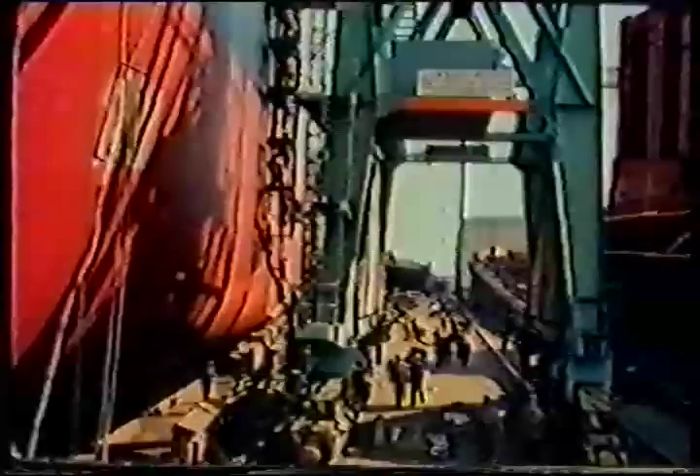Thyssen-Nordseewerke in Emden is one of the major shipyards in the Federal Republic of Germany. The company has 3 building berths for new vessels, 1 dry dock, and 2 floating docks. The Thyssen yard employs close to 4,000 people and averages an annual turnover of more than 400 million Deutschmarks. It is located right in the middle of the large North Sea shipping centers.

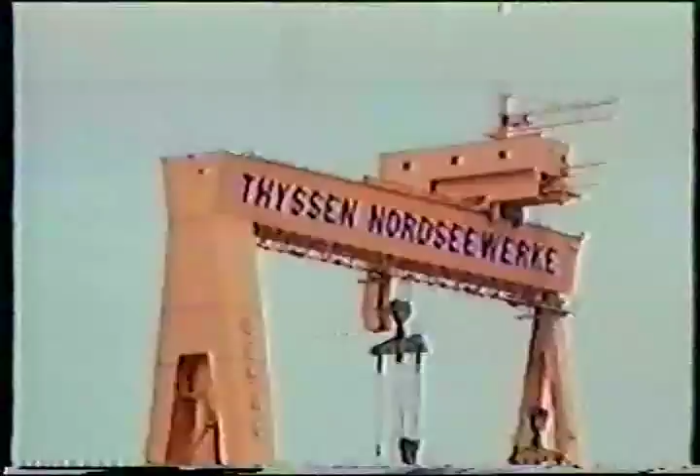Building ships for special purposes, both military and civilian, has had a long tradition at Thyssen-Nordseewerke. One example of this is the BACO liner, an entirely new type of ship. It works according to the dock principle. It is lowered like a floating dock to enable the docking and undocking of the barges.

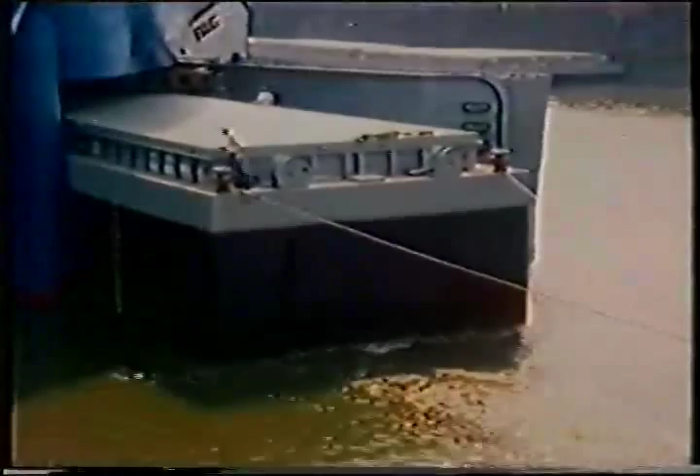In the ports of loading and discharge, the barges, 12 with a carrying capacity of 800 tons each, can be transshipped within 2 hours. Protracted waiting periods are avoided by employing 3 sets of barges, 1 set each in the ports of loading and discharge, while the 3rd set travels continually on the BACO liner. The containers, a maximum of 500, are handled by the ship's own gantry crane.

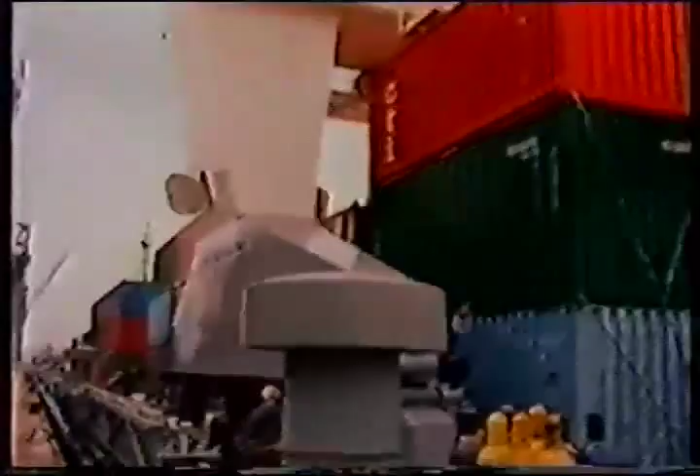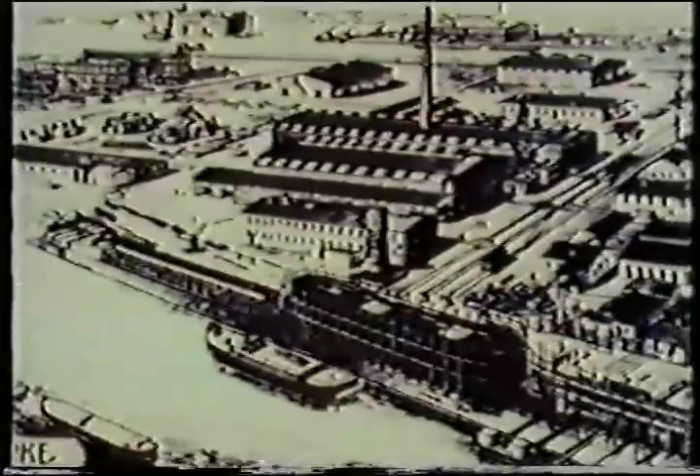In the summer of 1979, the first BACO liner left the port of Bremen on its maiden voyage to the Nigerian capital of Lagos. In 1978, the Thyssen yard celebrated its 75th anniversary. In 1903, the company was entered into the commercial register with a share capital of 2.1 million Goldmarks. In 1911, Kaiser Wilhelm II coined the phrase, "Germany's future lies on the seas." The country's general economic upsurge led also to a rapid expansion of the Nordseewerke shipyard.

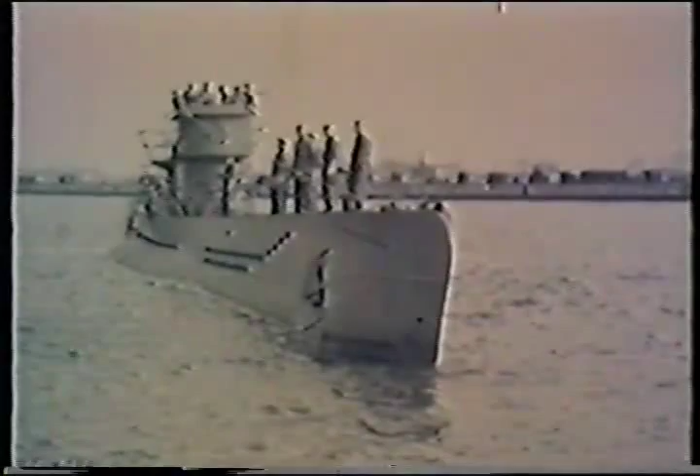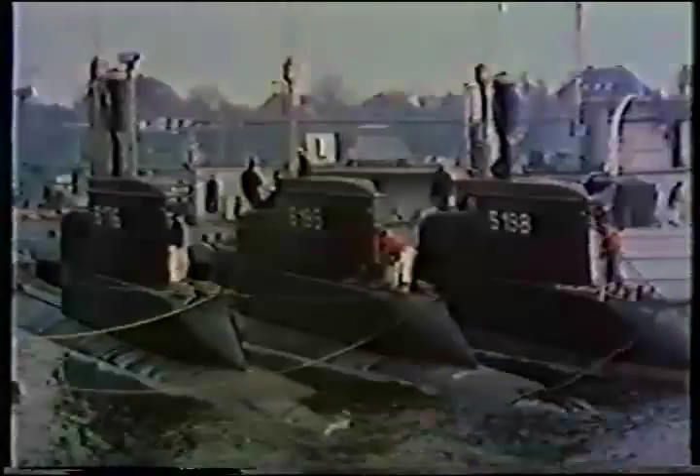The company's tradition of special shipbuilding began during the First World War and was continued during the years of World War II. Until 1945, 30 submarines were launched at Emden. The 60s and 70s brought new significant orders for special naval vessels. First, 15 submarines were built for the Royal Norwegian Navy, then another 10 for the West German Navy. These 25 submarines are a significant contribution to the naval defense potential of the 2 countries. During naval maneuvers of the NATO Defense Alliance, these submarines have proved to be most reliable and effective.

The company's expertise in specialized shipbuilding became the decisive factor for concluding a contract with the Argentinian government. Since 1978, the yard has been engaged in the design and construction of the TR-1700 prototype for the Republic of Argentina. The TR-1700 submarine is characterized by great diving depth, an extensive operating range at economic speeds, its worldwide employment potential, and excellent maneuverability.

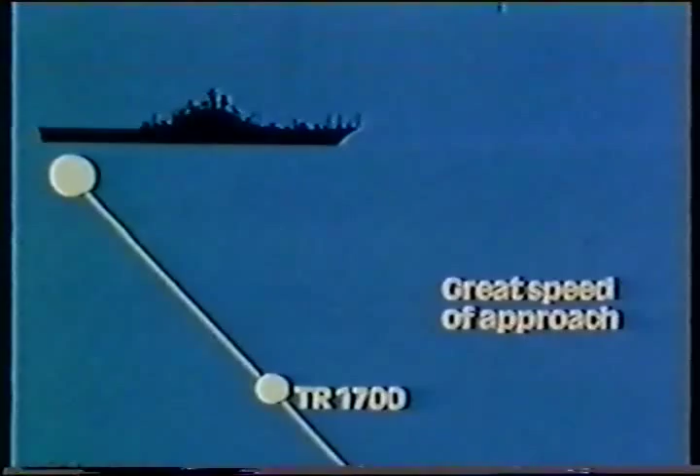Because of its high top speed, the TR-1700 submarine is capable of pursuing even fast-moving targets. This enables the ship to catch up with an enemy even from disadvantageous starting positions. The TR-1700 carries highly sophisticated equipment. Its components are supplied by the leading manufacturers of the Western world and meet the most exacting requirements of modern naval warfare.

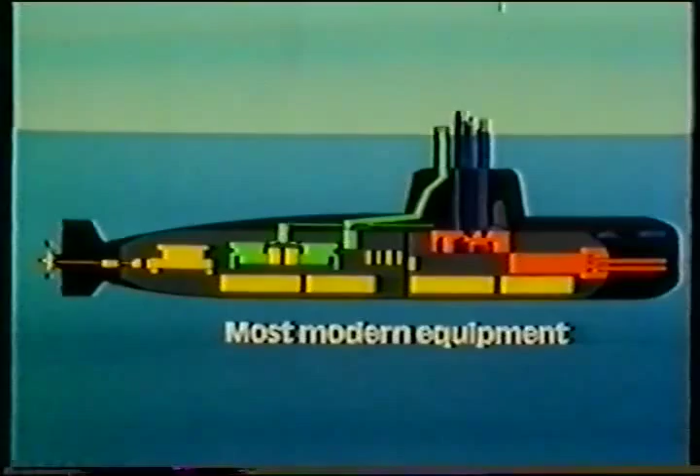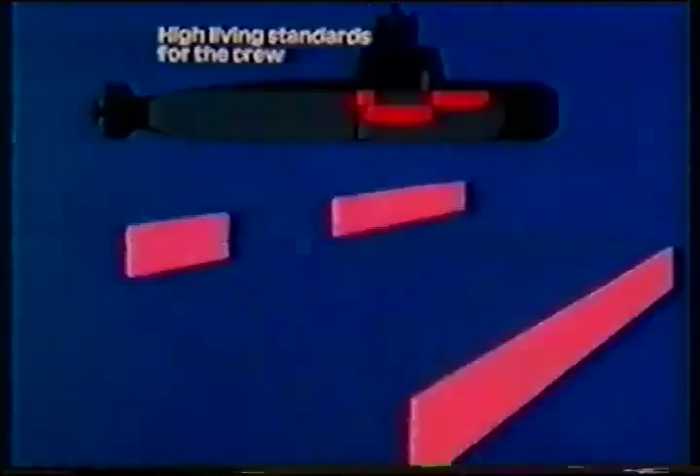To ease the extraordinary strain of long missions, a high degree of living comfort is provided for the crew. The officers' cabins, the cabins for the chief petty officers, the crew's accommodations, the messes, the galley, and the sanitary facilities offer extraordinary comfort in a confined space.

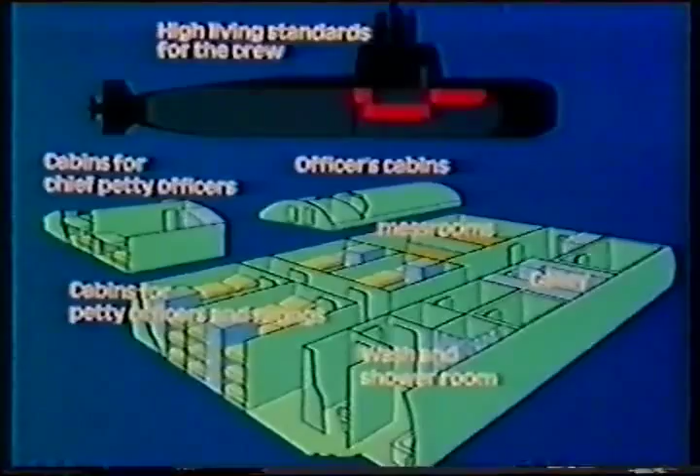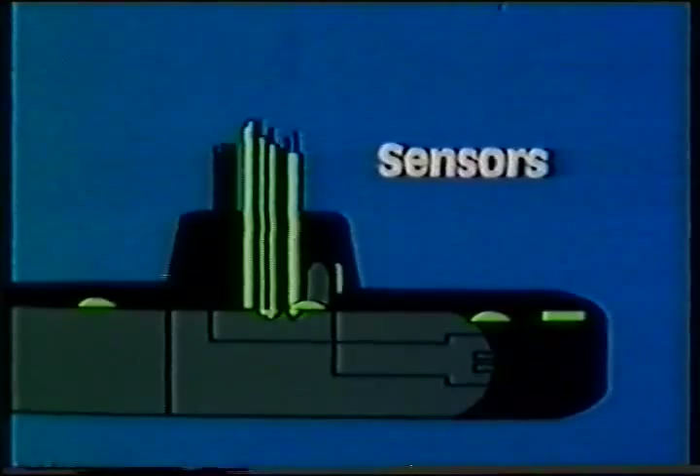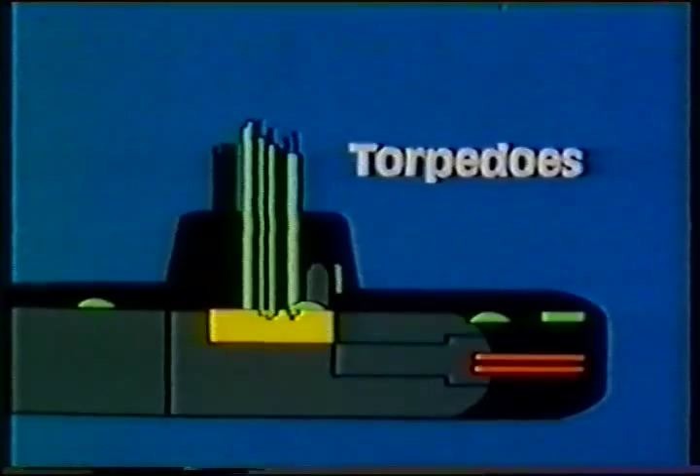The submarine forms the basis for a sophisticated weapons system: super-sensitive sensors, the fire control system, and the wire-guided torpedoes. The surface sensors consist of periscopes, radar system, and ESM system.

The data from these devices, used only while the submarine is surfaced or submerged at periscope depth, are gathered in the Combat Information Center. With these surface sensors, it is possible to detect, locate, and recognize surface ships, aircraft, and helicopters. Still more important are the underwater sensors, the sonar systems. The main sonar system operates both in the active and passive modes. In the passive mode, it can receive noises emitted by surface ships or submarines and thus locate these vessels even at great distances. Sound waves emitted in the active mode can, by means of reflection, detect objects that do not produce any noise of their own.

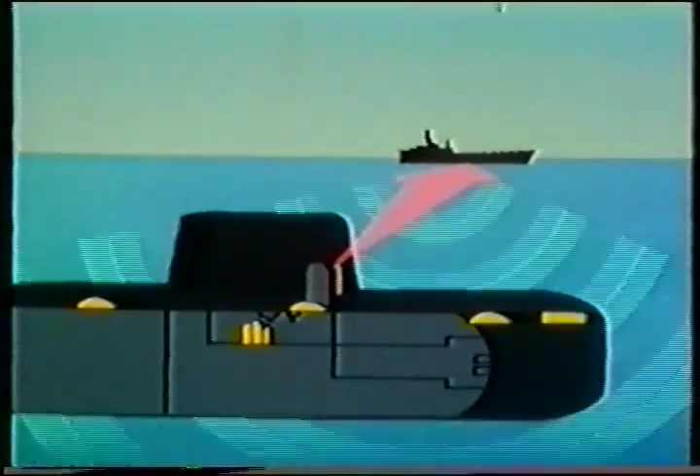All target data are fed into the fire control computer, which evaluates the target bearings by means of a sophisticated digital computing system and freely programmable processors, and transmits the target data to the weapons. The fire control system is capable of tracking and engaging several targets simultaneously with a very high hit probability.

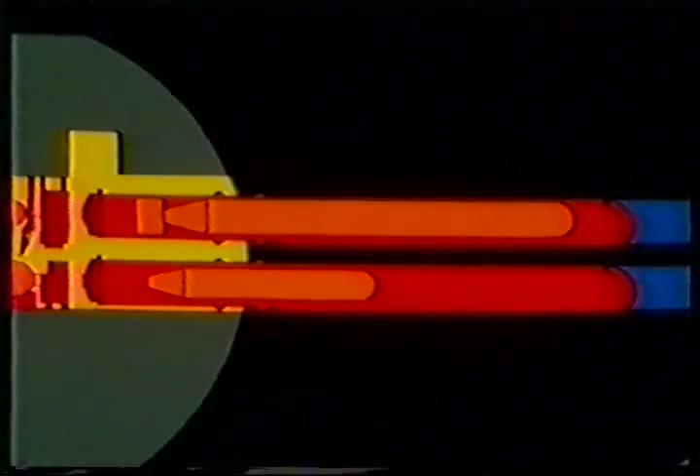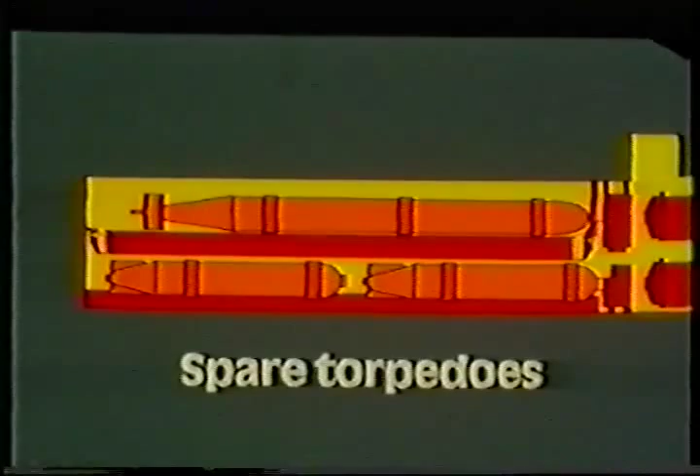The torpedoes are housed ready to be fired in 6 torpedo tubes. The torpedo tubes are designed according to the swim-out principle, which means that the torpedoes leave the tubes self-propelled. The fighting power of the submarine is considerably increased by the reserve torpedoes housed in the torpedo store. A hydraulic mechanical system enables a rapid reloading of the tubes.

The TR-1700 has a rescue system which allows to save the lives of a trapped submarine crew in a great number of conceivable emergencies. A pressure-proof bulkhead divides the submarine into 2 compartments, each allowing the crew to survive for up to 7 days, until they can be picked up by a rescue submarine, such as the DSRV of the U.S. Navy.

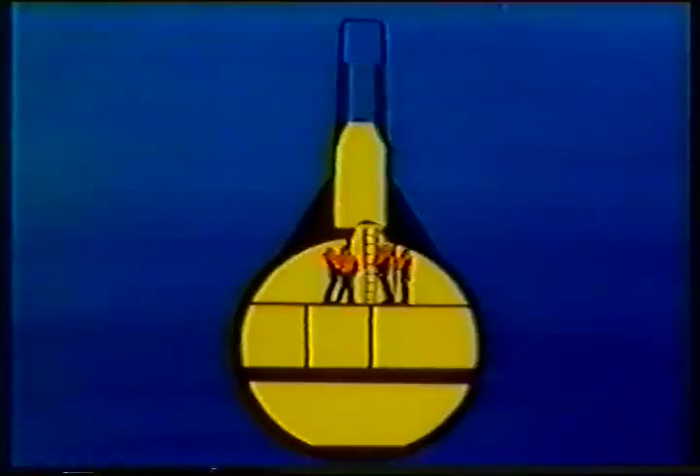In depths of up to 150 meters, the crew can leave the submarine in small groups through the diver's lock. At depths of up to about 100 meters, the compartments can be flooded. Once pressure equalization has been attained, the crew members leave the boat in quick succession and climb aboard the life rafts released from the submarine before.

Another safety feature is the hydrazine system. In case of a danger situation, such as the jamming of the hydroplanes, the submarine can be surfaced by blowing the ballast tanks instantaneously.

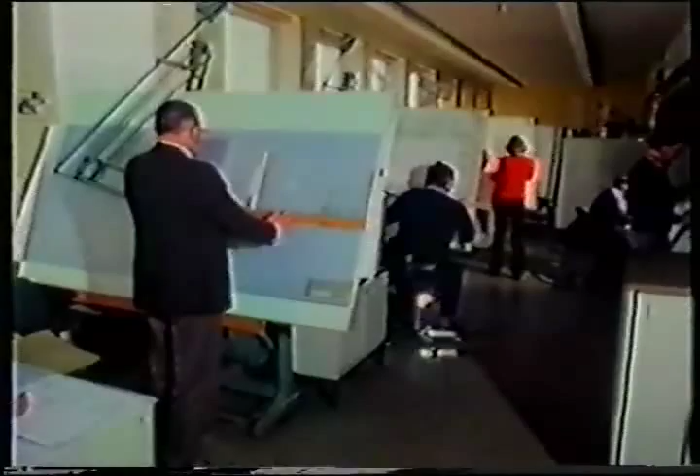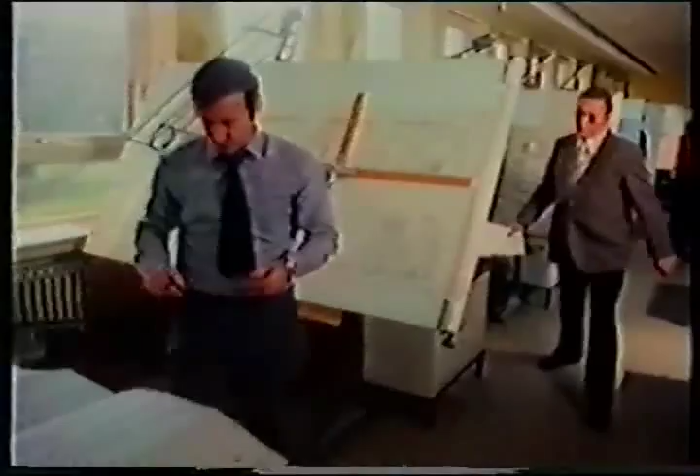The planning, design, and the building of a prototype for a new naval vessel require creativity, genuine teamwork, and particularly exact timing. A whole staff of engineers, technicians, and draftsmen spends months in the elaboration of the project. From the first line on the drawing board to the day of the sea trial, every design and construction detail is fixed in a critical path diagram.

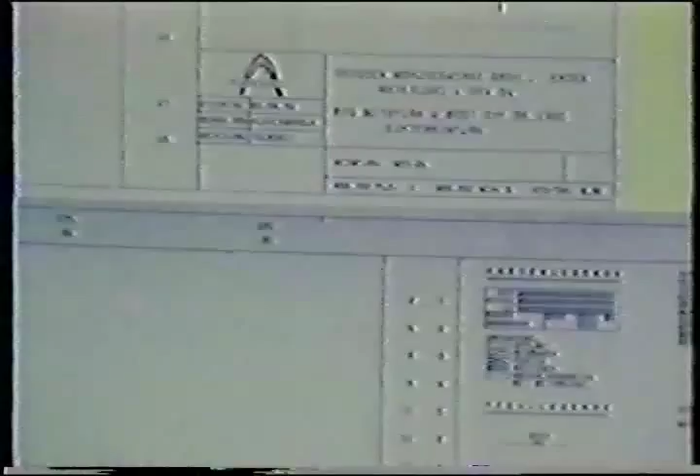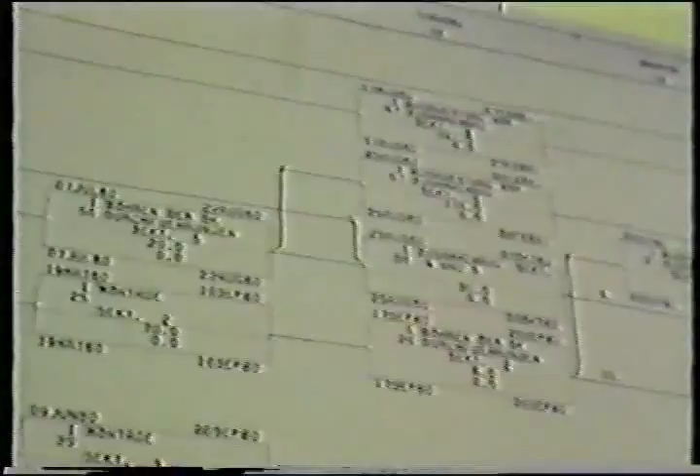The ship is divided up into clearly delineated production units. Sectional building plays a major role in such projects. This production method requires a maximum of coordination because several different workshops are involved in the construction and pre-outfitting of the sections. Apart from the typical shipbuilding processes, there is a large number of pipes, foundations, machines, generators, ladders, covers, and other components that have to be built into the sections.

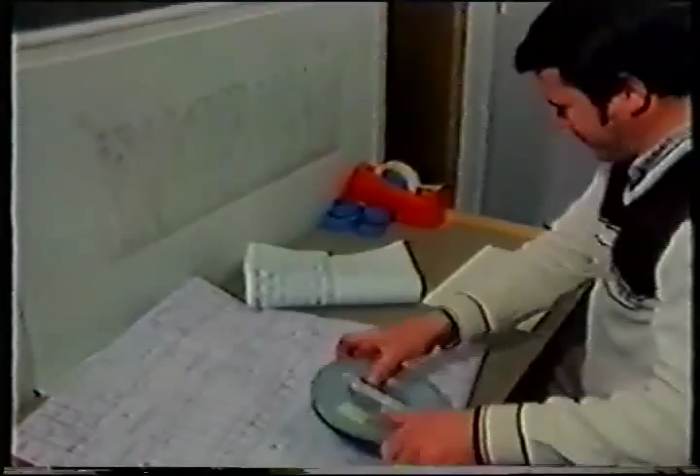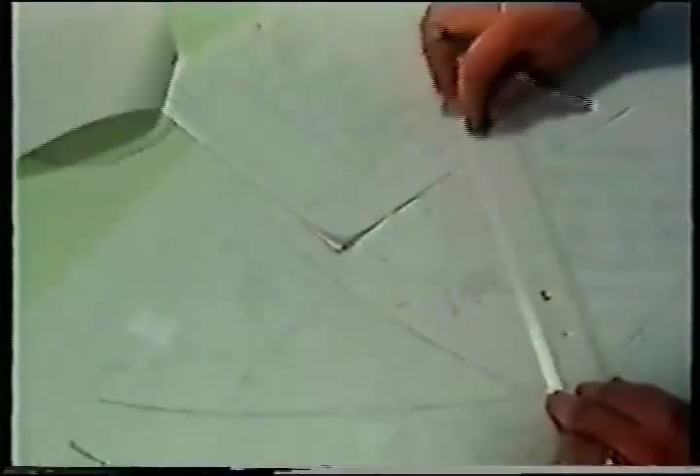The first step from the design to the construction phase is taken with the aid of electronic data processing. The design data of the ship have been changed into computer language and stored on magnetic tape. This data bank forms the basis for the further elaboration of the production process. Every single part of the ship's hull is coded and skillful arrangement combines several different parts on one single plate for the flame cutting.

A punching unit connected to the computer turns the total of data and information into a perforated tape which controls the flame cutting machine. To check the control tape, a numerically controlled drawing machine produces an outline of all pieces to be cut from one plate.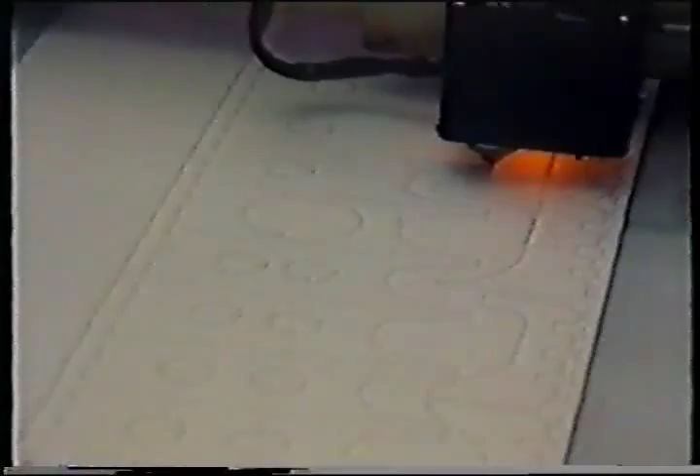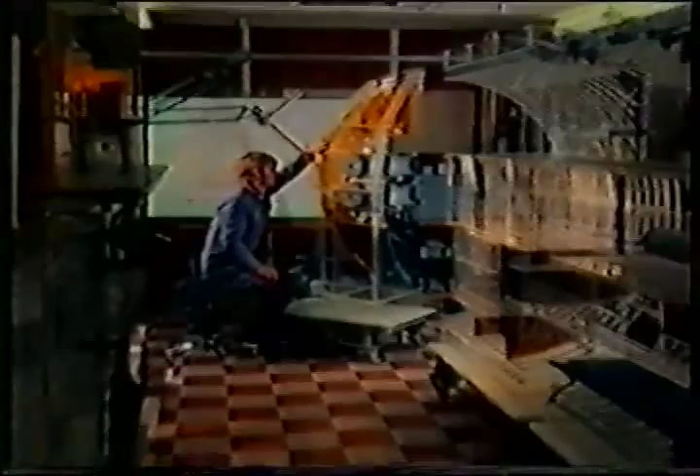Parallel with the planning and design work, a model of the TR-1700 submarine on a scale of 1 to 5 is built in Nordseewerke's model workshop. This model, easily dismantled, reveals important details of construction, assembly, and design.

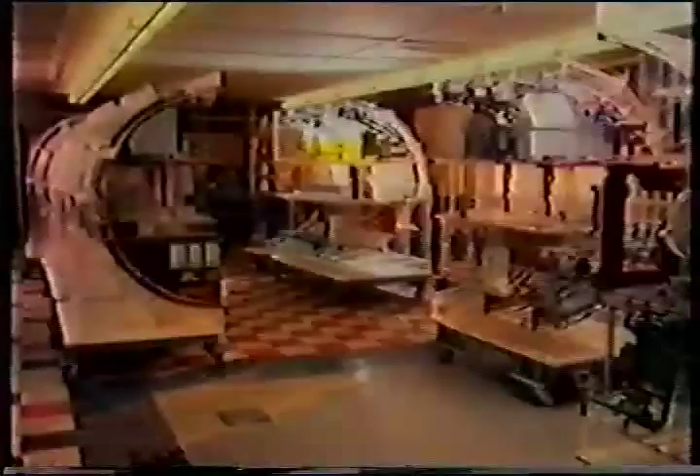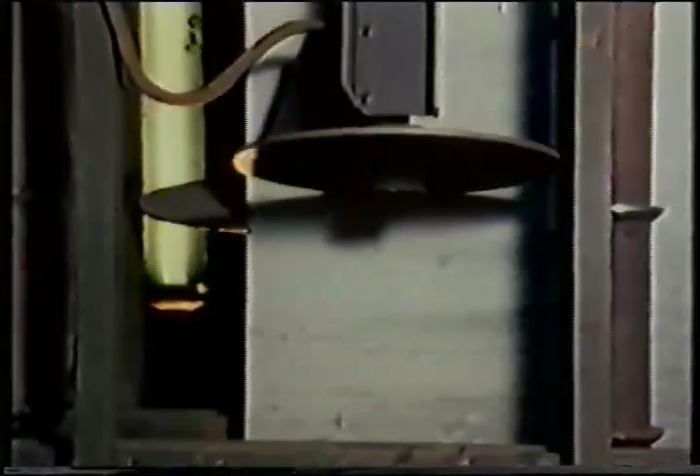Before the start of production, the materials are made available. Plates and profiles, mostly made of high-tensile HY80 steel, are supplied by a Thyssen company from the Ruhr area and stored in the plate and profile store. Before their use, all plates and profiles must be shot blasted, primed, and marked.

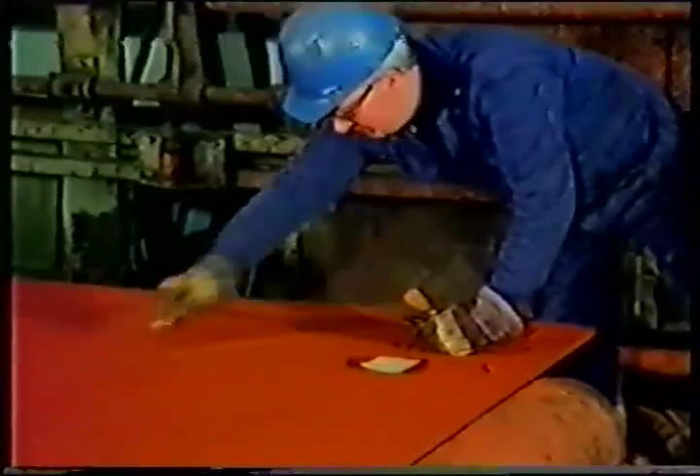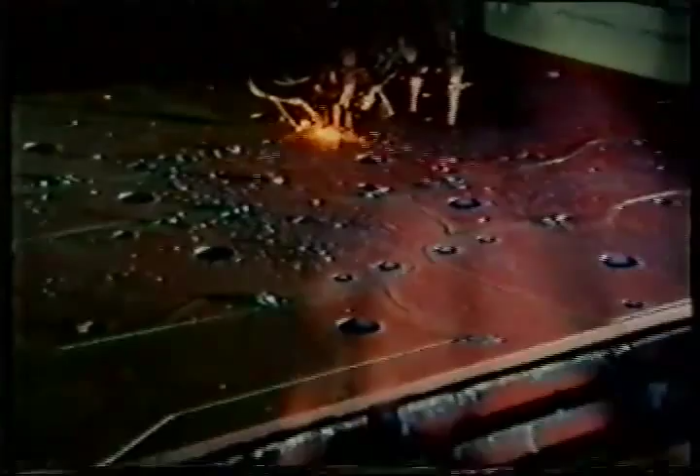After arrival in the flame cutting hall, the plates are marked and cut by numerically controlled flame cutting machines. Then the welding joints are prepared, holes, cutouts, and shaping cuts are made true to gauge. The pressure hull plates are pre-shaped by hydraulic presses and then cold rolled to measure on a bending roll.

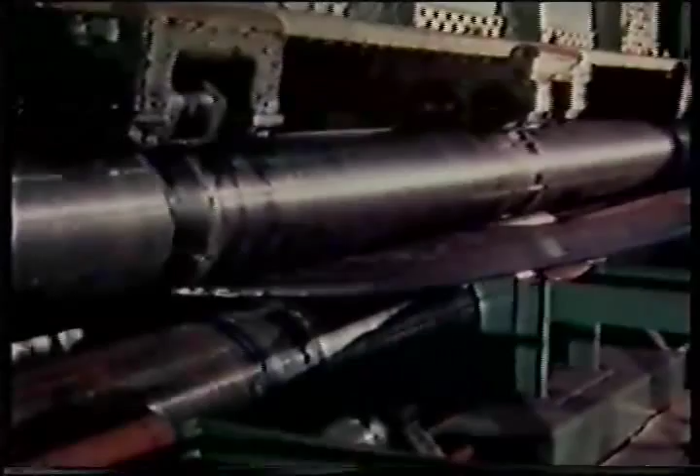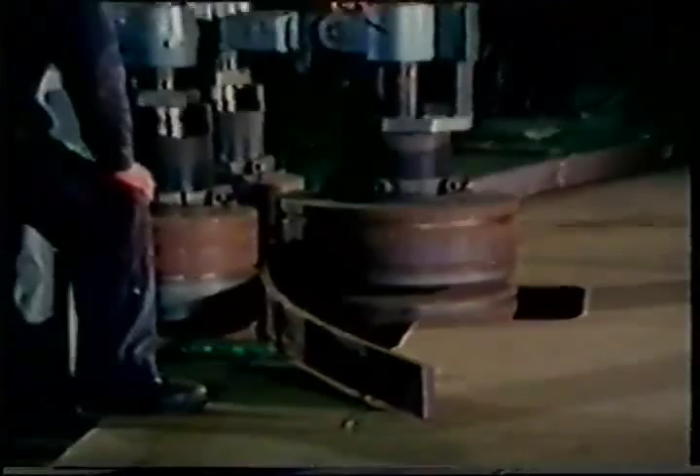Elsewhere, the frames are put together. A frame consists of several flange and web plate segments which are welded together. The flanges are rolled from flat steel. The webs are flame cut from plates. For the assembly of the frame, the segments are placed into a tack and assembly jig and tack welded.

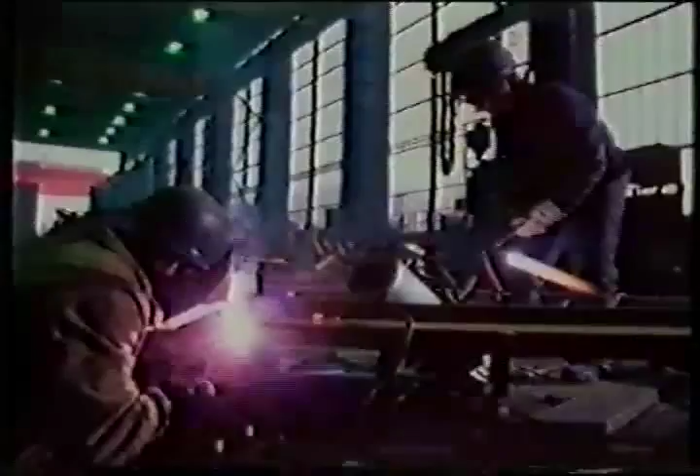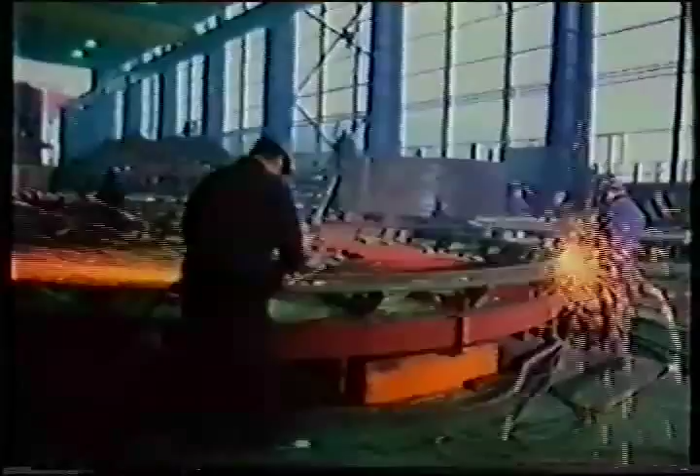Mounting of the restraining elements to the first annular frame. Compasses are used to check the circularity. The seam is prepared. Then web plate and flange are welded together. This kind of work requires particularly experienced, specially trained welders. Several frames and the corresponding pressure hull plates form a subsection.

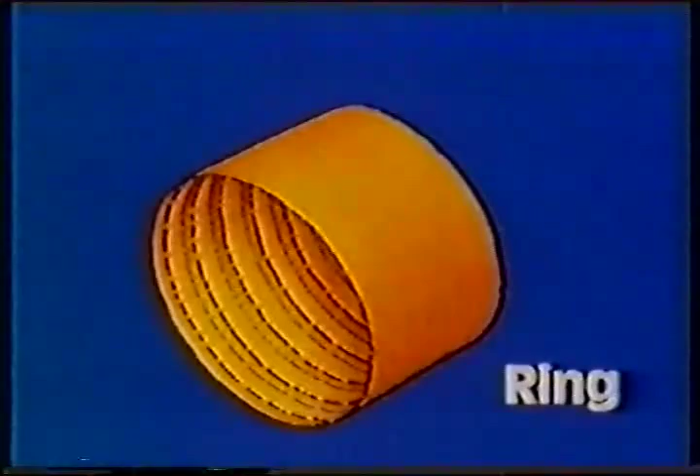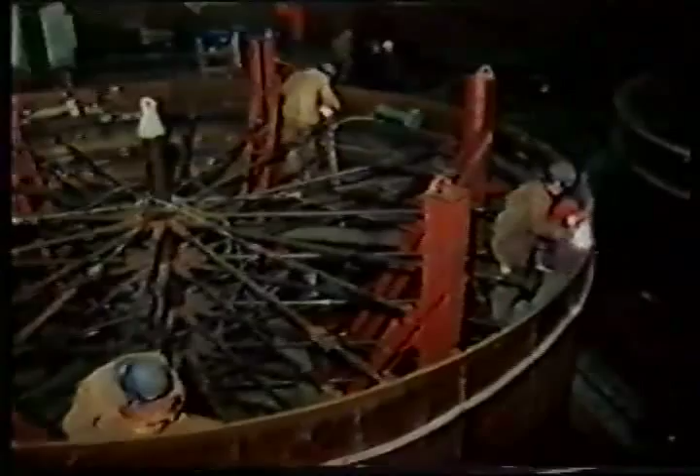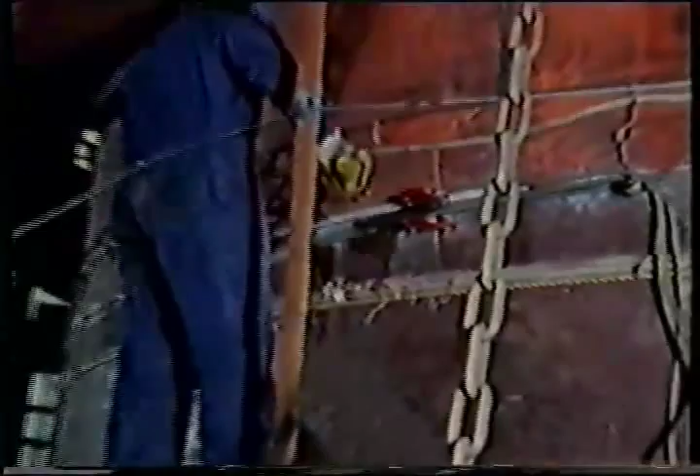The treatment of the pressure hull plates and the fabrication of the frames are followed by the fabrication of the subsections, a highly complex part of the production. The pressure hull plates are aligned, tack welded, and preheated. Now follows the welding of the seams. The root layer is ground and all the welds are inspected with testing equipment. Several subsections form a section, in which also parts of other structures are incorporated.

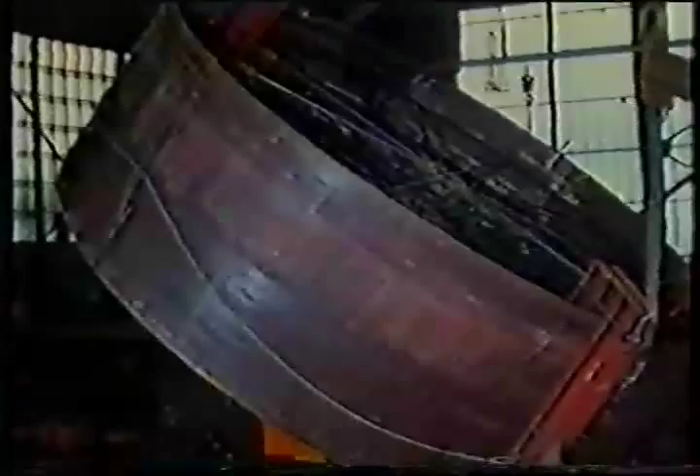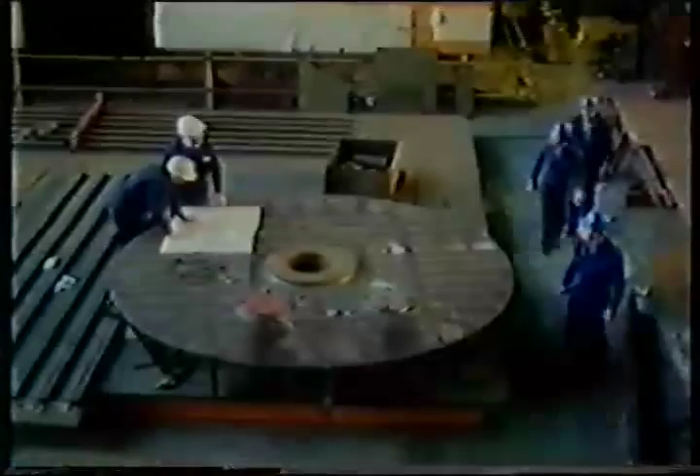The restraining devices and the staging have to be removed. The components are placed on slewing mechanisms, enabling them to be turned into an optimal working position. Walls, decks, bulkheads, and tanks, as well as the supports for engines and aggregates, are assembled individually and incorporated into the section.

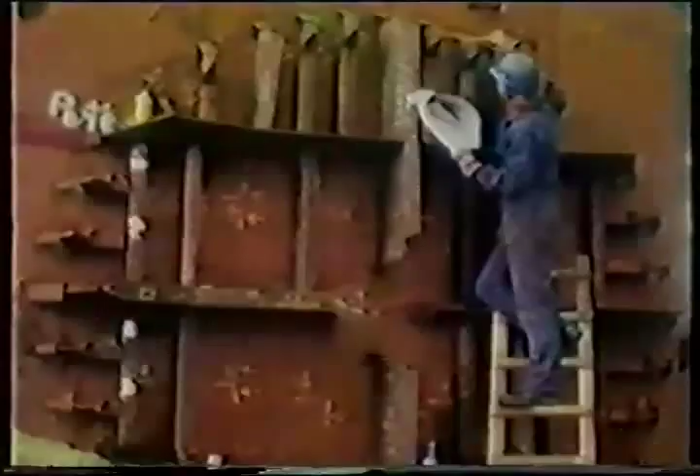The battery compartments are assembled to form large boxes and then fitted into the section in blocks. For the installation of cable and pipe supports, special automatic welding machines are used.

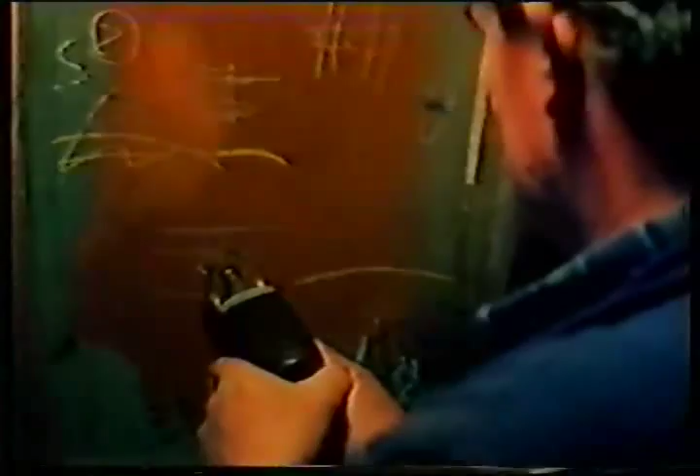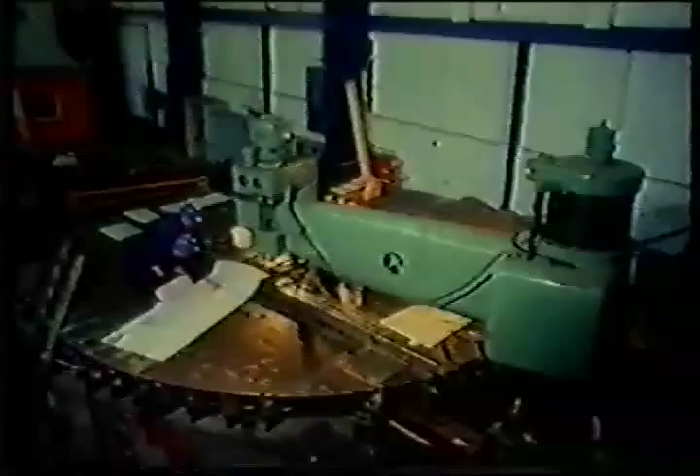The pressure-resistant transverse bulkhead is also built separately and then fitted into the section. Manufacture and assembly of this bulkhead are extremely complicated. The transverse bulkhead serves to divide the submarine into two watertight compartments. Special care has to be taken when drilling holes for the lead-through of cables and pipes.

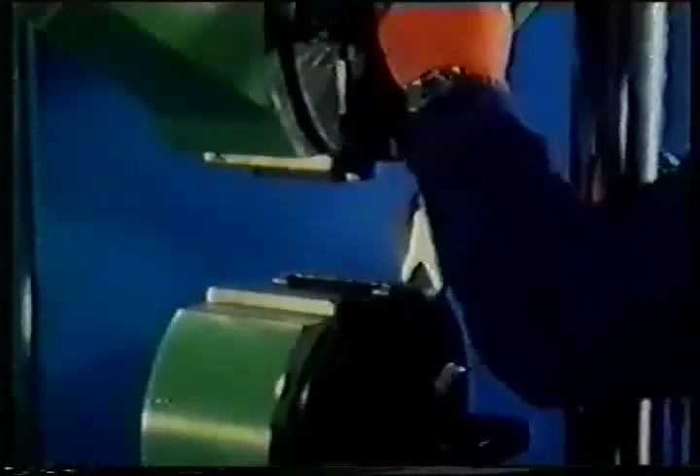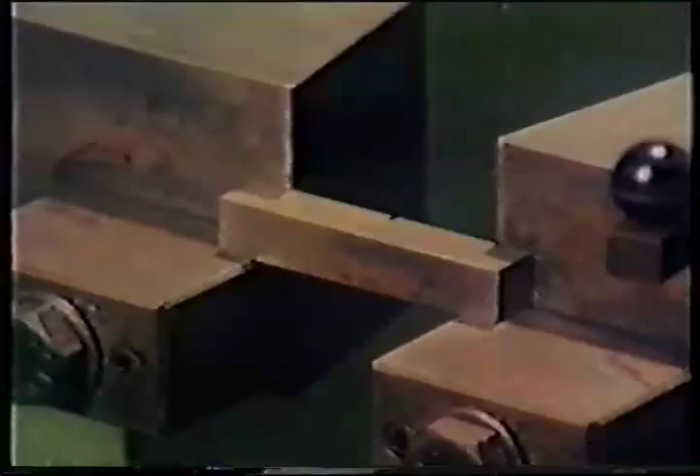All materials and processes are tested in the testing laboratory. To prove the tensile strength of welded connections, sample pieces are subjected to tests that go far beyond their expected yield values. For the manufacture of the pressure-resistant parts, such as the pressure hull, bulkhead, access shaft, and torpedo hatch, preference is given to steel with high tensile strength and notch toughness. One example is the heat-treatable HY80 steel, developed especially for the manufacture of submarines.

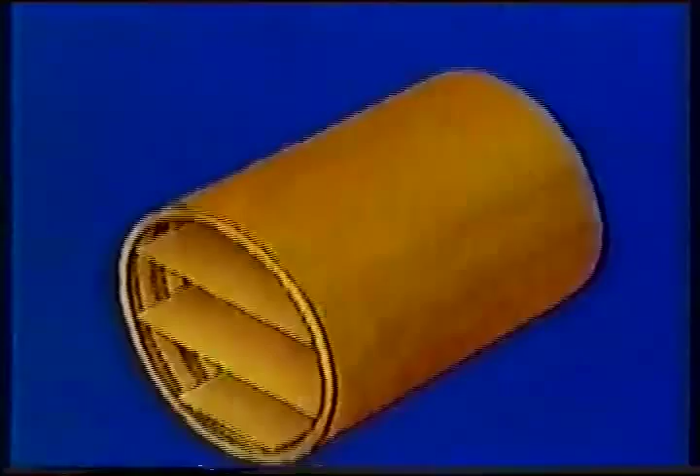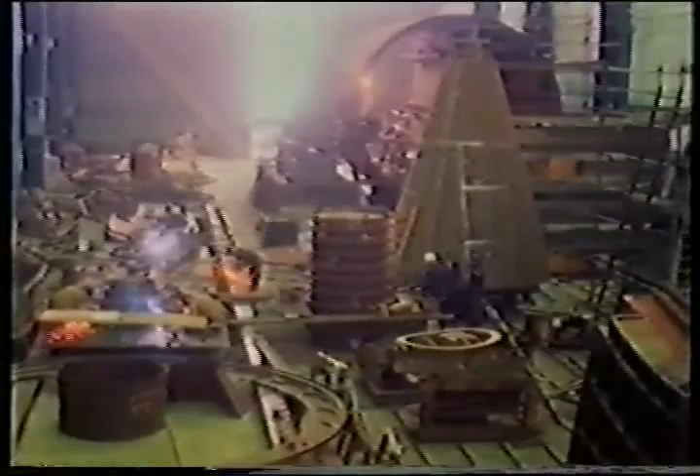In the presence of the Commander-in-Chief of the Argentinian Navy, the keel laying of the first section of the TR-1700 prototype was celebrated in a short ceremony at the Thyssen shipyard. Now begins the actual assembly of the submarine. All the sections together finally form the pressure hull. The sections are assembled in a hall for which special security measures have been adopted. This is also where the pressure-resistant reinforced access shaft is built.

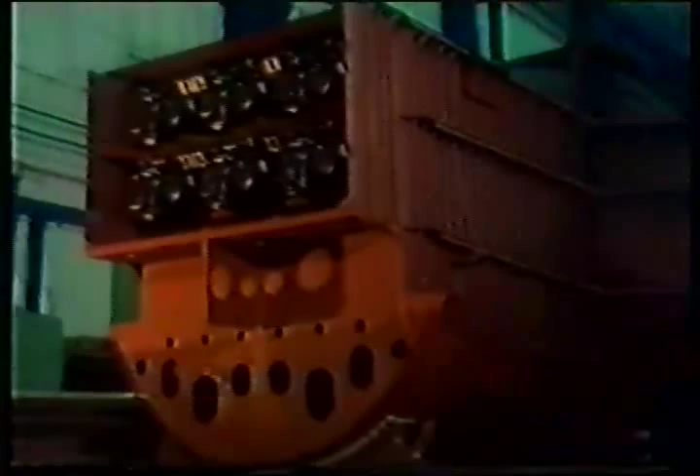The bow section of the boat is equipped with the torpedo tubes. Part of this section is a spherical bulkhead, the forward ceiling of the pressure hull. This bulkhead is penetrated by the 6 torpedo tubes, arranged in 2 rows, one above the other. Sealed with heavy, forged covers, they will later house the torpedoes, ready to be fired. While the submarine is underway, this forward section is flooded with water.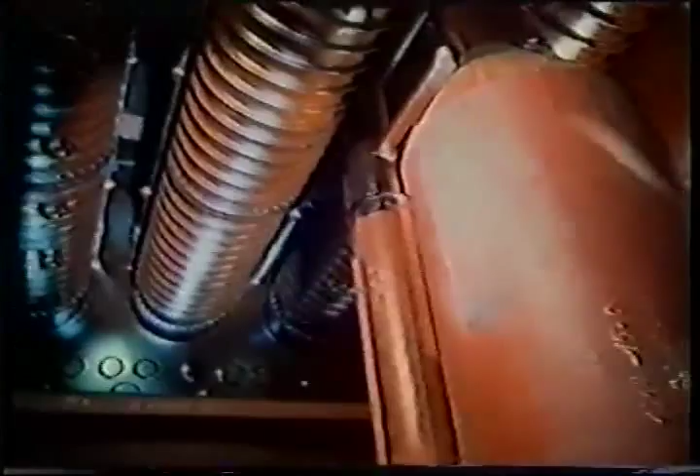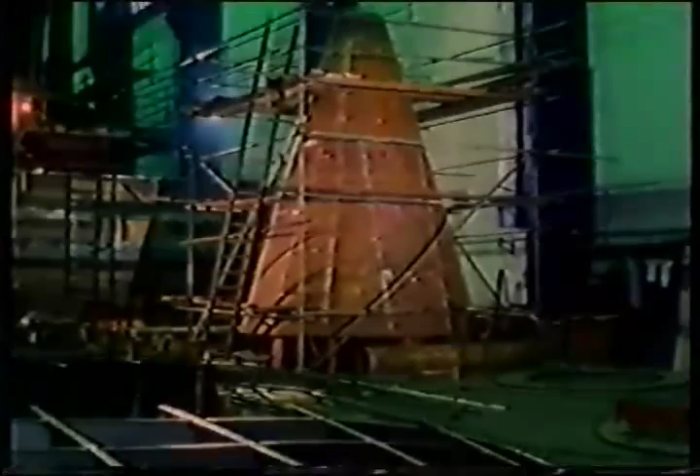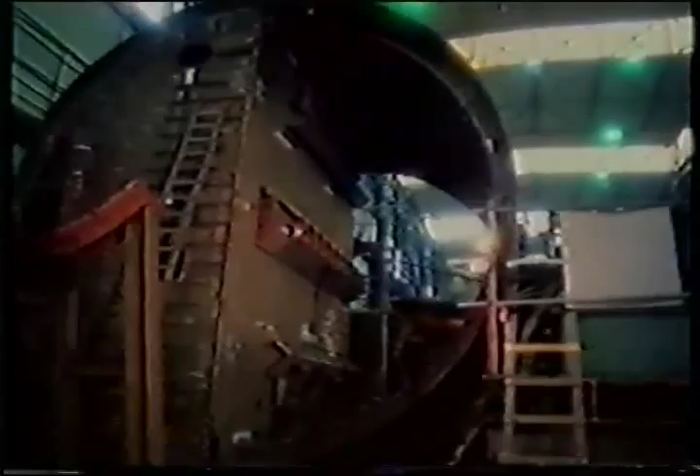The assembly of the course-keeping and depth-keeping rudders is a complex process and requires specific templates. For the pressure hull penetrations, special reinforcements are made and welded into position. With slewing mechanisms, each section can be brought into an optimal position for the boring of the penetrations. A transportable boring machine is accurately aligned and then carefully starts taking off chip after chip.

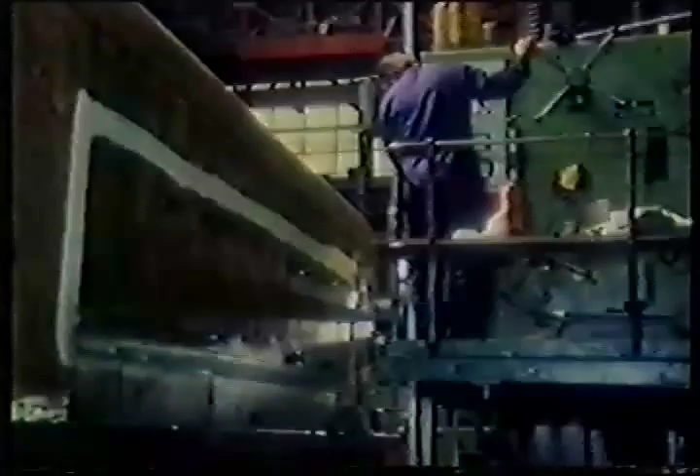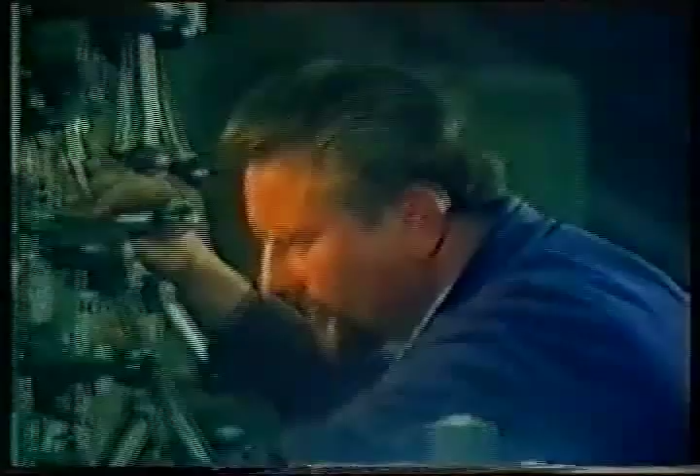For the passive sonar systems, windows are milled into the sidewall steel plating and later covered with fiberglass reinforced plastic plates. The noise level of a submarine has to be kept as low as possible. For this purpose, engines and generators are supported by special foundations of layered steel and rubber elements. These elements act also as effective shock absorbers.

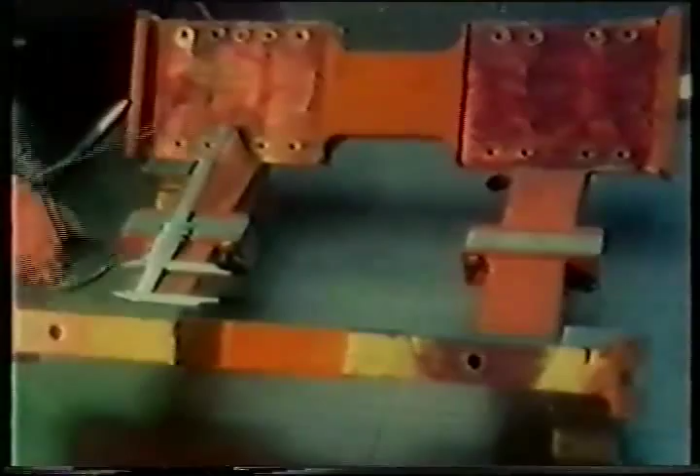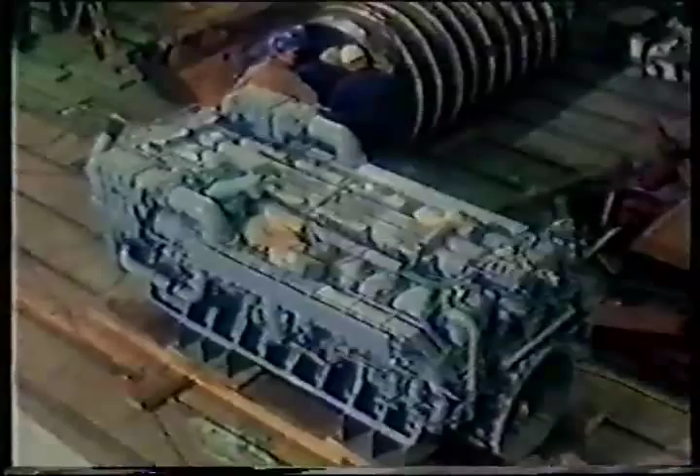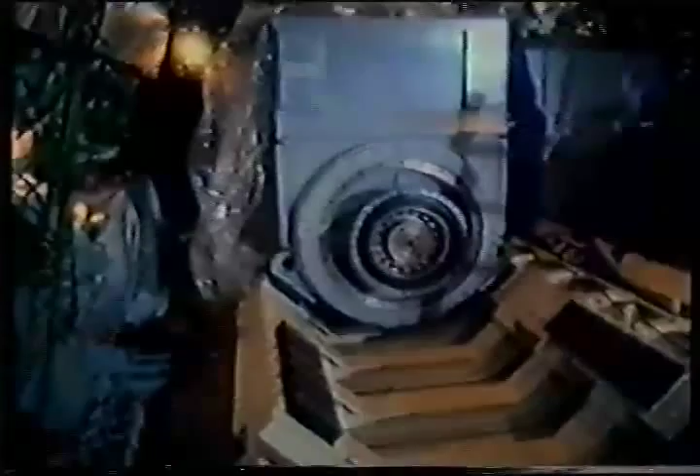Prior to the installation of the engines in the engine room, the elastic elements are carefully fitted into their exact positions. Diesel generator groups are installed with the aid of a crane and special supporting structures. Most connections in the seawater exposed sections of the submarine are made of copper-nickel alloys, which have proved to be resistant to both seawater and wear and tear.

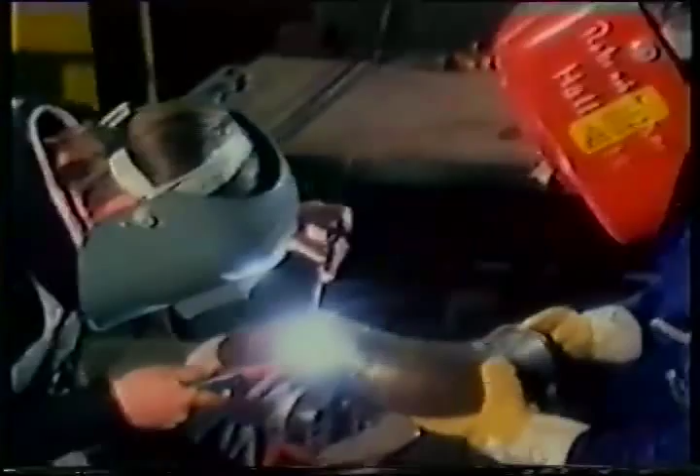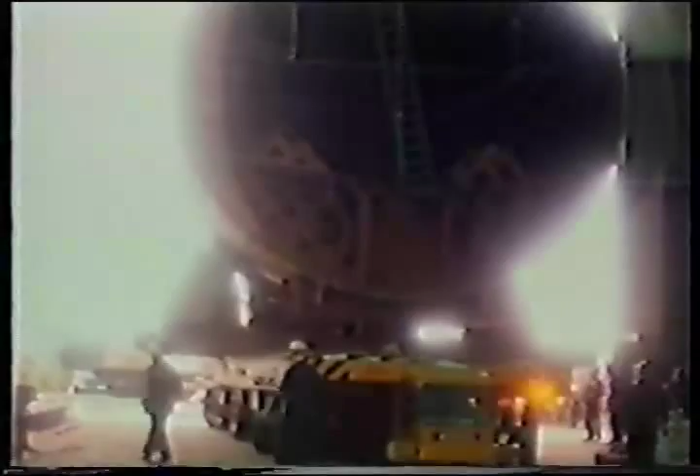All sections are sandblasted and coated with primer. A heavy-duty lifting truck transports the aft section of the submarine from the sandblasting hall to the assembly hall. During the entire building period, all the components are securely and safely stored on supporting and transport foundations.

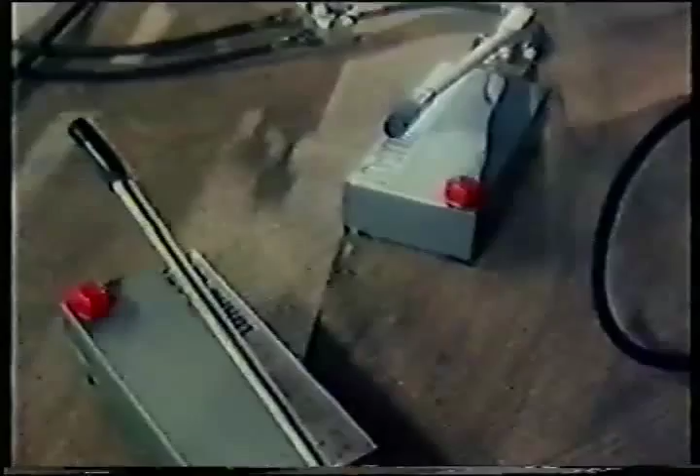Knowing the exact weight of the submarine is extremely important for the hydromechanical calculations. In order to match the design values, each individual section has to be weighed. This is accomplished by 4 electromechanical pressure cells. Any component which is installed later also has to be weighed exactly.

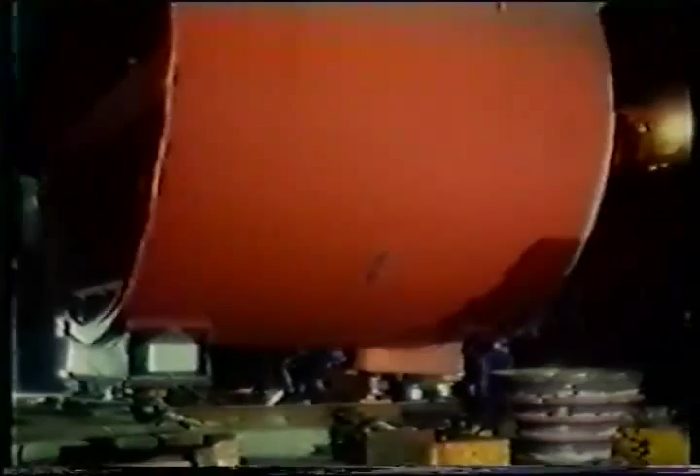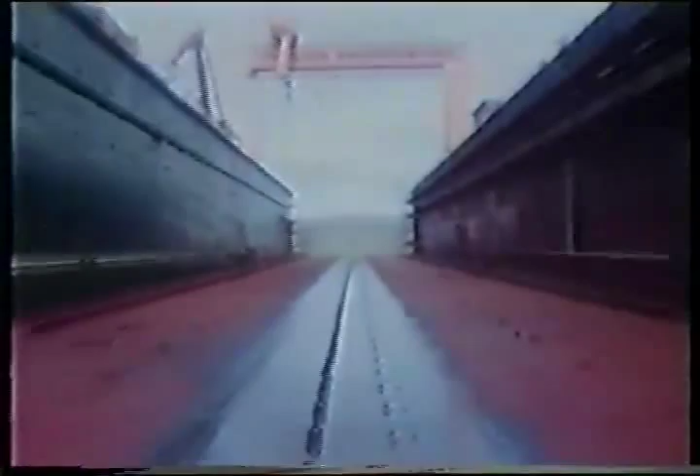Meanwhile, all individual sections have arrived in the assembly hall. While the outfitting and installation work is progressing at a lively pace, the welders are joining the first connecting seams. The launching of the submarine requires a floating dock capable of satisfying all the requirements as to trimming capability, pumping capacity,